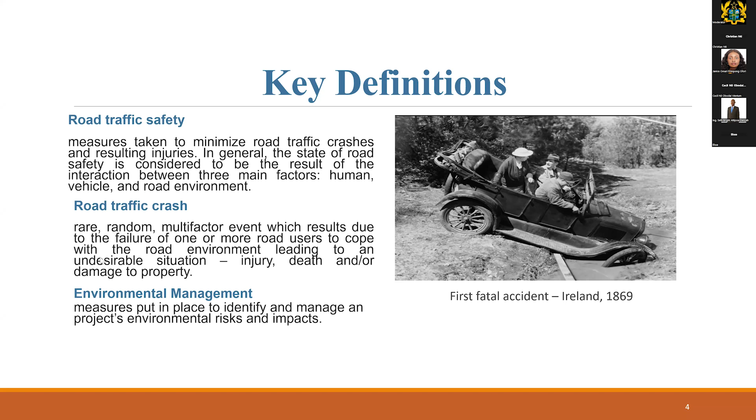When we come to our national crash statistics, according to National Road Safety Authority in 2022, road traffic crashes kill over 2,000 people annually and 15,000 injured, with 6,000 victims seriously injured and rendered economically inactive. The socio-economic cost of road traffic crashes in Ghana is estimated at 1.6% of its GDP.

The number of crashes have risk factors that are contributing to these numbers, and they are non-existence of walkways according to the statistics, motorists who are traversing the roadway at high speeds, faulty vehicles, driver fatigue, and the absence of road furniture on some of our roads.

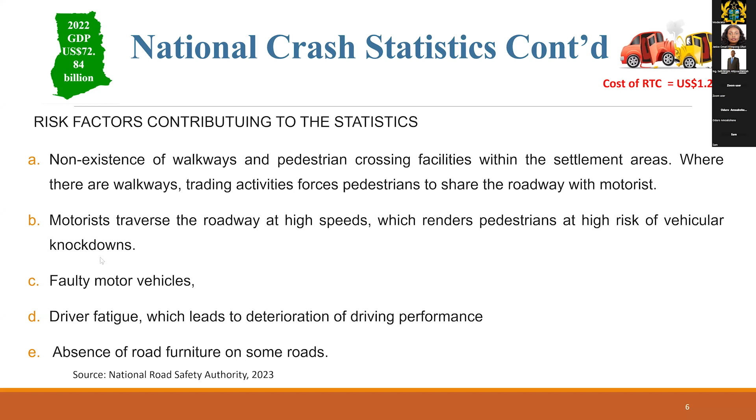There are universal strategies that are adopted to deal with road safety issues. We have the proactive strategies, that are strategies that you adopt before the crashes or accidents happen. And then we have the reactive strategies, that are strategies that you implement after the crashes have happened. With the proactive strategies, we have road safety audits, IRAP star ratings. And with the reactive strategies, you have accident investigation analysis. Road safety audits, as we all know, are formal safety performance examinations of an existing or future road or intersection by an independent and multidisciplinary team.

And the IRAP star ratings are an objective measure of the level of safety which is built into a road through more than 50 road attributes that influence risk for vehicle occupants, motorcyclists, bicyclists, and pedestrians. These last three are the vulnerable road users.

Now, the project cycle. Every project goes through a cycle. We start with identification, preparation, appraisal, negotiations, procurement, negotiations, implementation, and then completion and evaluation. Now, today's presentation will focus more on the implementation stage.

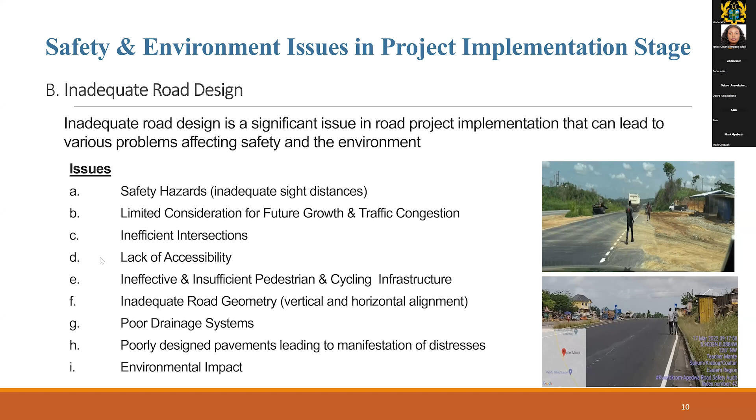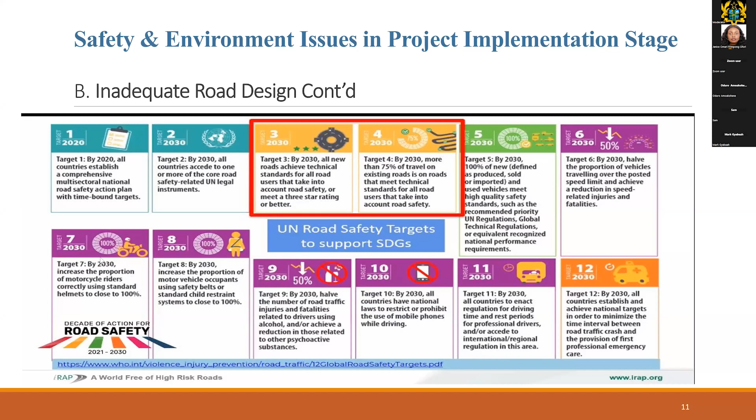Another issue is traffic management challenges. Normally, traffic management is a critical aspect of road project implementation. Issues in this area can lead to congestion, safety hazards, and disruptions. Here are some of the common traffic management issues in road project implementation.

When you poorly execute detours and road closures, they lead to confusion and congestion. Inadequate traffic control measures during construction can also lead to traffic management challenges: lack of proper detours, insufficient signing and markings, unplanned road closures, and limited pedestrian and cycling accommodations. You need to make sure that the pedestrians and cyclists moving in your work zone are catered for.

Inefficient traffic flow management and limited use of technology. As Engineer Yolanda Kome said in her presentation, we need to incorporate efficient traffic flow management and use ITS to help us manage our work zones better. Inadequate coordination between the contractor, consultant, and supervising authorities also means traffic management challenges are not managed well.

Sometimes we implement projects on roads that are brownfields, and this is a key issue that has to be handled well. As an example, we did a traffic management plan on the Tema Motorway interchange project. The contractor submitted his traffic management plan and we gave him comments. But later we sat down and realized that the Tema interchange is a very key road that leads to the hinterlands, connecting the port and the hinterland. So we decided to go back, take traffic data, and simulate to make sure that what the contractor had submitted would work.

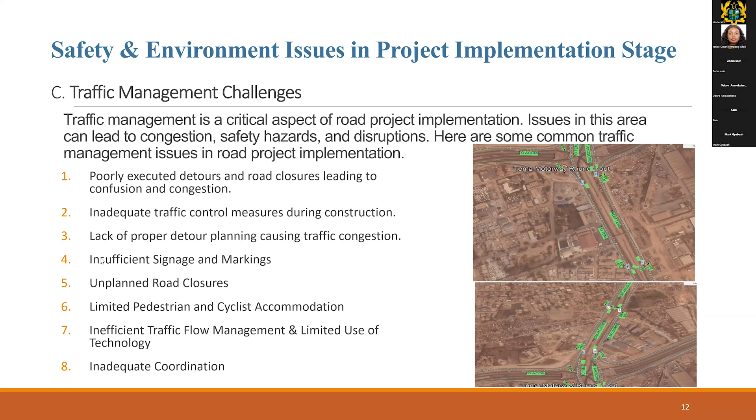Communication is key. Our PRO, Engineer Cecil Wintum, has done another presentation on communication. It is very key, we need to communicate. We need a comprehensive communication plan, stakeholder engagement. We need to use variable message signs, that is ITS, and deploy those things in our work zone. We need public awareness campaigns, and avenues to receive complaints from the stakeholders.

Work zone safety is another issue in the implementation stage. We need to efficiently design our work zones to ease congestion and minimize accidents and delay. Inadequate signage is a problem in the work zone. Poorly managed traffic flow is a problem. Protecting worker safety is also an issue. Inadequate visibility at night is also an issue, and pedestrian safety in the work zone is also an issue.

Lack of supervision is an issue. There needs to be supervision, because once you leave the workers, even after training them, people would like to do things their own way, so supervision is really key. Road surface condition: even in the work zone, the road surface must be good. We need to maintain the road surface in good condition for the road user. Another key issue is worker equipment and material safety, and supervision again.

There should be worker training, adequate PPEs, and maintenance of the vehicles and tools that the workers use on site. There should be safety measures for construction equipment, deploying safety technologies such as collision avoidance systems, backup cameras for vehicles, and proximity sensors for blind spots in equipment. And then we need to secure hazardous materials; it is very important that hazardous materials on our sites are secured so that it will minimize accidents.

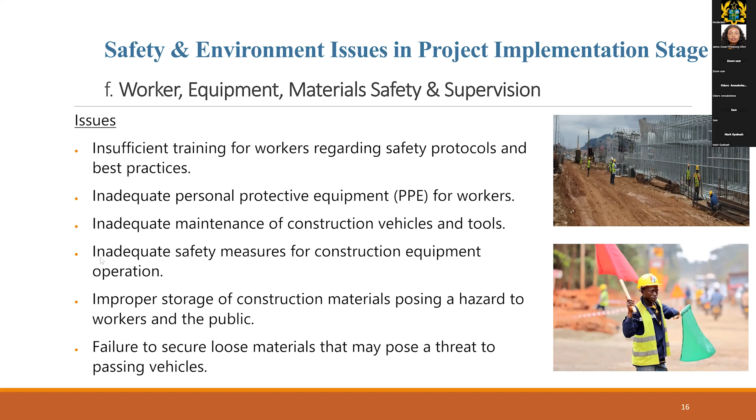Another key issue is emergency response preparedness in the implementation stage. We need to develop a comprehensive emergency response plan for the site, and post it for everybody to see how emergencies are handled. Even in our homes, we should post and train our household on what to do when a fire comes, or when there's a burglary.

Do we have our whistles in the right places to alert our neighbors that we are being attacked? All these are key, and we must take it onto our site, train, and plan our emergency response. We must make sure emergency vehicles like fire tenders and ambulances that need to traverse our sites are catered for. We should have a plan, with gated roadways we can open for them, because it might be me today in the ambulance, it might be you tomorrow. We all need to consider these people in our work zones.

Environmental impact is also a key issue in the implementation stage. Road works impact on the environment, and the environmental issues are a lot: air, noise, water, vibration, pollution. Some measures we need to adopt are to assess and address potential environmental impacts on our project, and implement measures to prevent soil erosion, water pollution, and other ecological concerns.

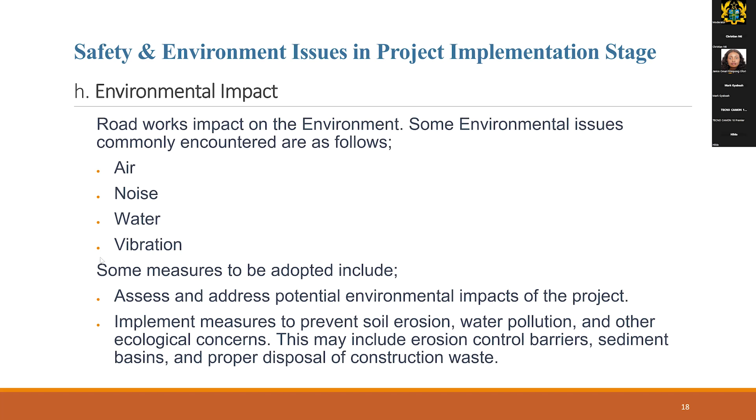Recommendation and the way forward. We need to do a comprehensive safety planning for road projects. It is very key; without it we cannot properly plan for our road projects. Safety planning is key. We need to do road safety audits before we implement the designs, because it is easier to make changes on paper than when they have been implemented. So road safety audits are very key.

We need to implement intelligent traffic management plans. ITS is very key, it's the way forward. We need to incorporate some of these in our designs and then make sure we implement them.

We need good communication strategies. It is very important in our projects.

We need to prepare work zone safety plans for all work activities. We need to review them regularly, because the road work zone keeps changing and adjustments need to be made. It would make a successful project if we continue to evaluate and adjust our work zone safety plans.

We need to do safe equipment and material hauling plans to ensure that our equipment does not cause accidents and our materials also do not cause accidents. We need proper emergency response preparedness.